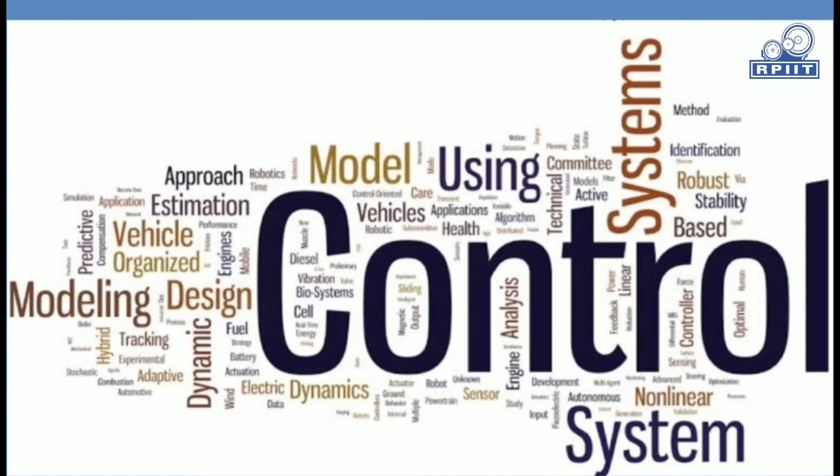So today I'm going to discuss control system. Control system is basically a very important field in electrical engineering. Before going in depth about the control system, we have to understand the basic concept of control and systems. So what is a system? A system is an arrangement or combination of different physical components connected or related in such a manner so as to form an entire unit to attain a certain objective.

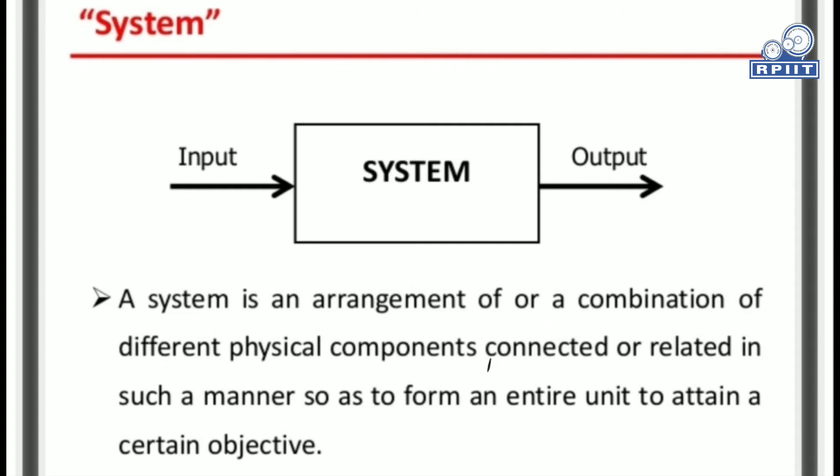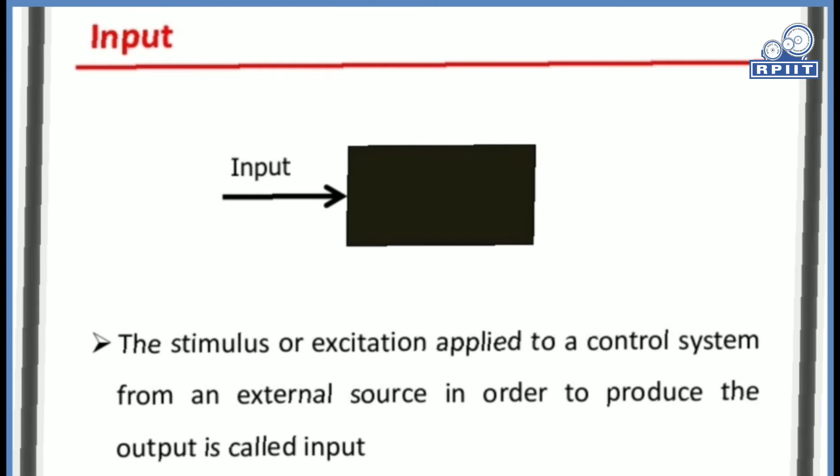So we can see in the figure we have an input that is processed through the system and we get output. This output may be our desired output or simply an output. So what is input basically? The stimulus or excitation applied to a control system from an external source in order to produce the output is called input. The actual response obtained from a system is said to be output.

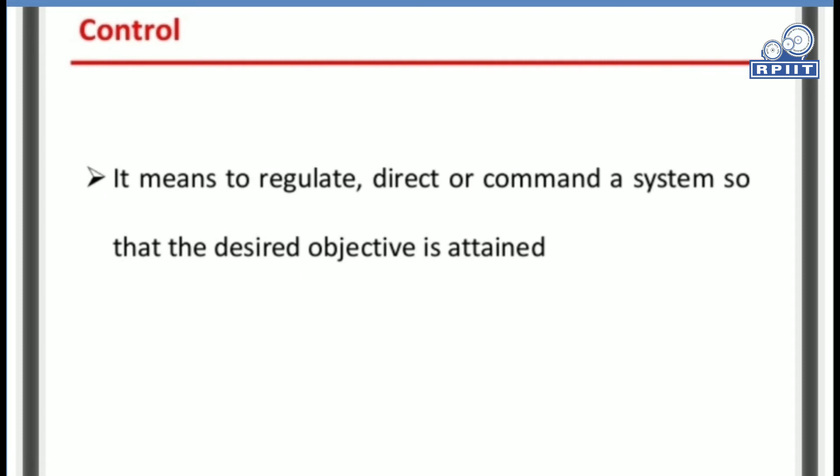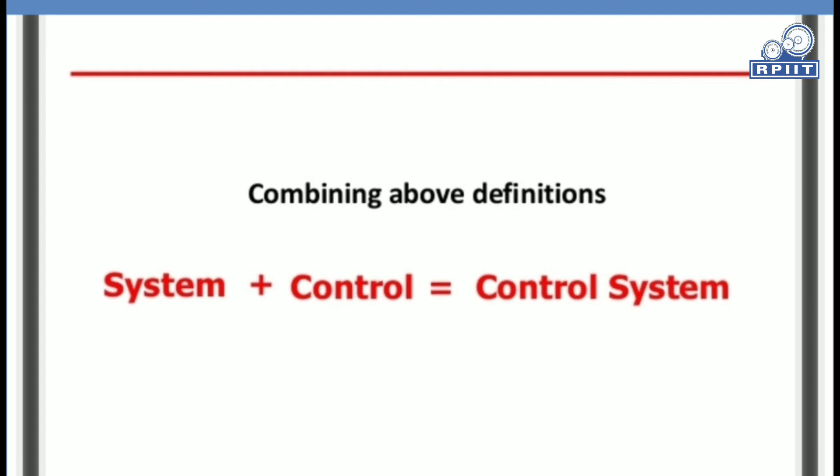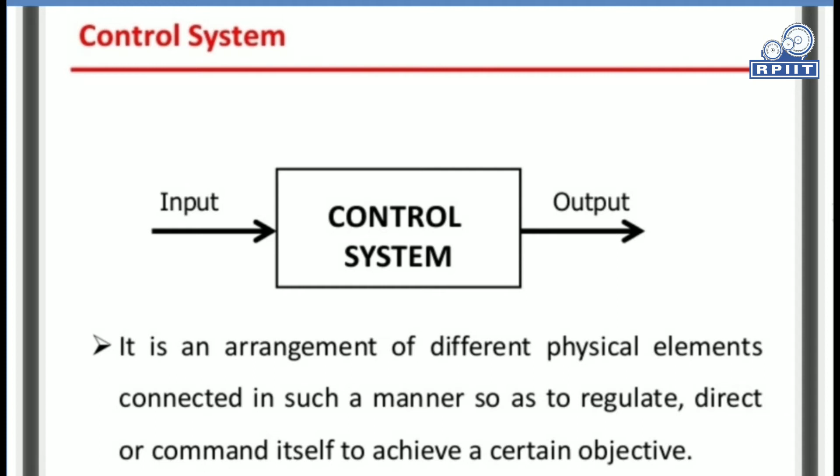Control means to regulate, direct, or command a system so that the desired objective is attained. So combining the above definitions, system plus control, we get a control system. We have the input, and if we process that input through the control system, we get a controlled output. It is an arrangement of different physical elements connected in such a manner so as to regulate, direct, or command itself to achieve a certain objective.

So what is the basic difference between system and control system? In a simple system, we have input and we get a proper output. It may be desired output or a simple output that is less than or more than our input processing. In a control system, with the processing input we always get a desired output. In a system we get a proper output, either desired or not, but in a control system we always get a desired output.

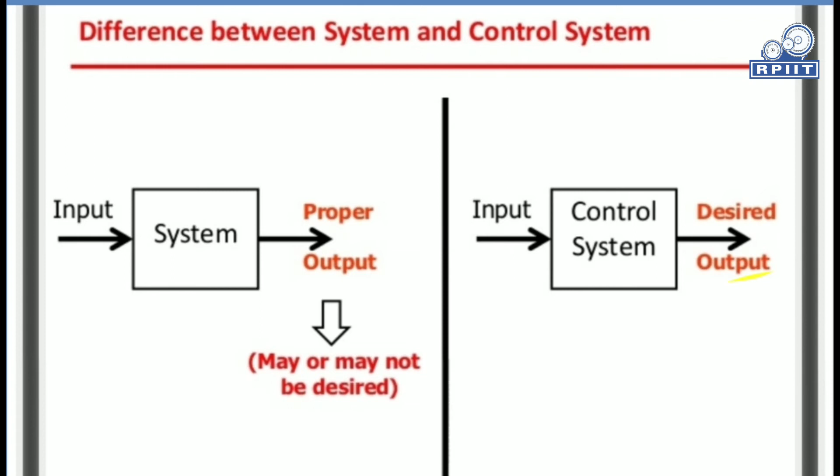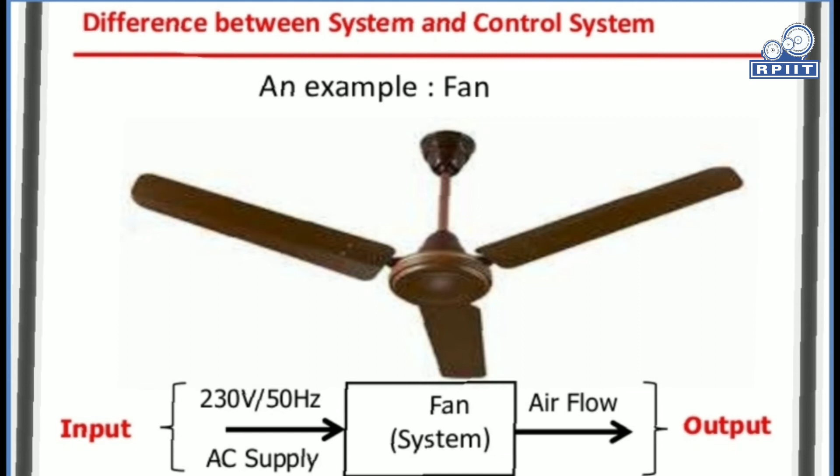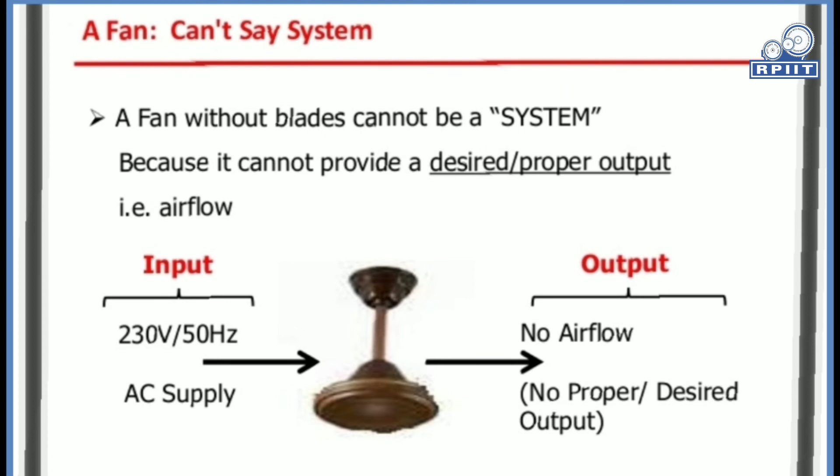We can understand this by a simple example: a fan can be a system and a control system both. In a fan we give an input of 230 volt at 50 hertz supply, and the fan behaves like a system, giving airflow as output. A fan without blades can't be a system because it can't provide desired output, which is airflow. Without blades we will not get any airflow, so there is no output.

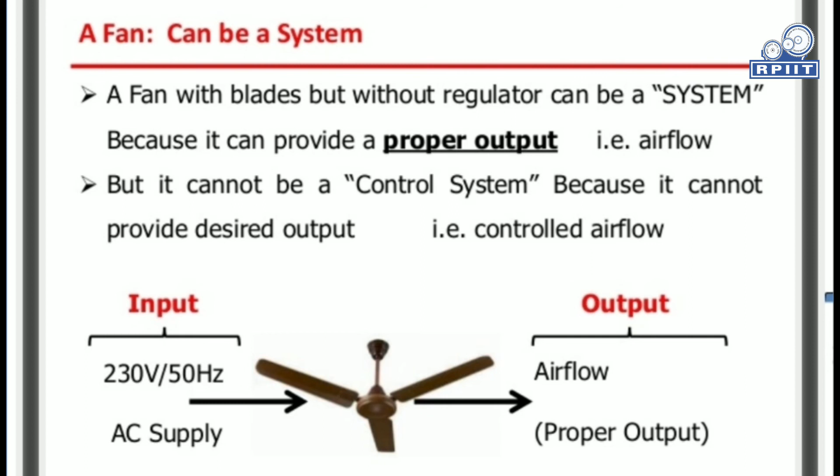A fan with blades but without regulator can be a system because it can provide a proper output, airflow, but it can't be a control system because it cannot provide desired output, that is controlled airflow. We have 230 volt at 50 hertz AC input, and by passing this supply to the motor of our fan, we get the airflow as output.

So we regulate our input supply, and on the basis of that regulation we control the airflow through the fan blades. So the fan behaves like a control system and we get a controlled airflow. So this is all about the control system.